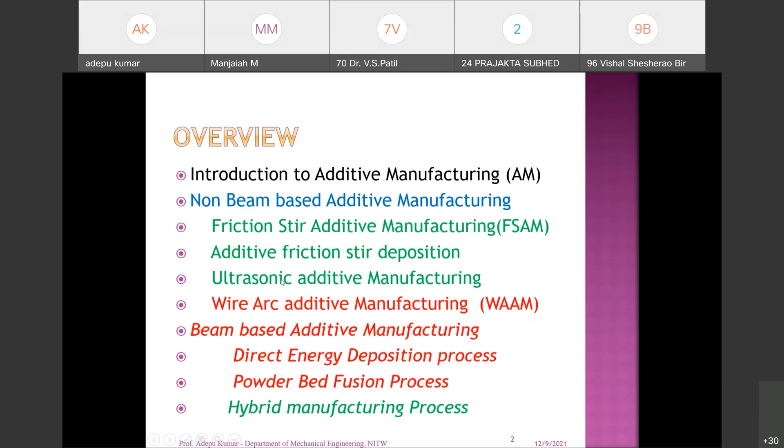So today I'm strictly focused on non-beam based additive manufacturing related to friction stir additive manufacturing, additive friction stir deposition, and ultrasonic additive manufacturing. If time permits, I can also extend to wire arc additive manufacturing. So basically, you can see the various manufacturing processes, how you are going to develop the component.

So based on the customer requirements, you can generate the component. Whatever the form, it doesn't matter from the customer's point of view. Whereas from the mechanical engineering point of view, we are concerned with the properties, how the properties are enhanced from one process to the other process.

So for example, if you want to develop this kind of object through any process based on the customer requirements, initially I can go for a subtractive process, where unwanted material can be removed by milling so that I am able to generate this kind of object. That's why you have to remove the unwanted material. So the material before and after may not be the same. After the milling process, the volume of the material is reduced, so it comes under a subtractive manufacturing process.

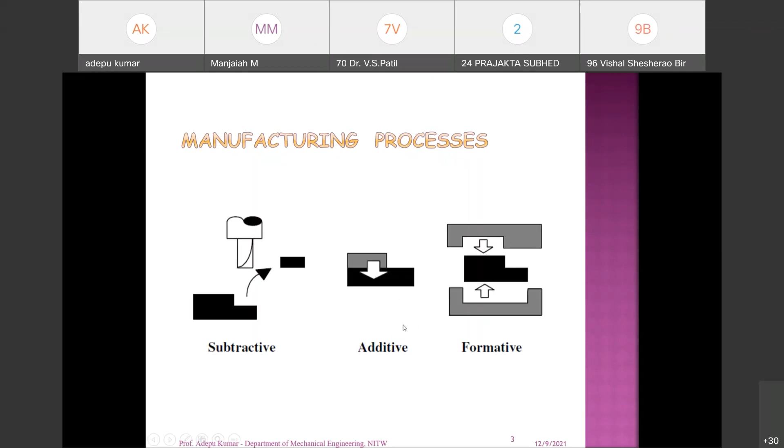So the definition of additive manufacturing is a manufacturing process in which functional parts can be made by adding material without using special tools, jigs, or fixtures. You already have experience in the laboratory sessions. Without need of any additional devices, you can also generate complex structures, because every 2D geometry is unique. You can print that 2D geometry, then build one over the other. Automatically, you can get different features.

So it provides tremendous advantages compared with traditional subtractive manufacturing, especially reduced lead time, and wastage is also minimized, and the cost is independent of complexity. This is the most important advantage of additive manufacturing. Irrespective of any complex geometry, the cost does not vary. Every time you are producing different kinds of features based on your STL file, so with respect to complexity, additional cost may not be increased. That's why it is the greatest advantage.

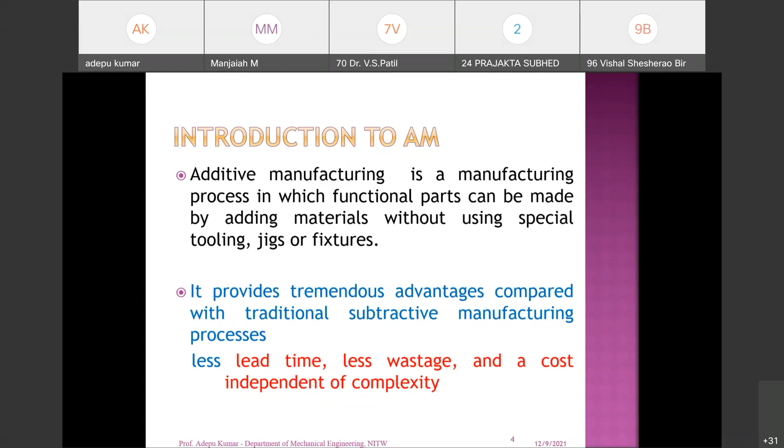So there are 8 stages that previous faculty members have already discussed. I don't want to extend further, but you can see the various stages of how you are going to develop the component for end user applications. The component you are going to generate is based on your idea or your previous experience. That geometry you can generate in the CAD environment, then convert it into an STL file. Then the file is transferred to the AM machine. This file is compatible with the machine, not your CAD file.

So the STL file, the stereolithography file, is a combination of 2D geometries. Each layer is a 2D geometry. Then you can set the parameters according to your requirement. Then you can build the component, remove the component from the substrate, go for post processing, and then use it for end applications.

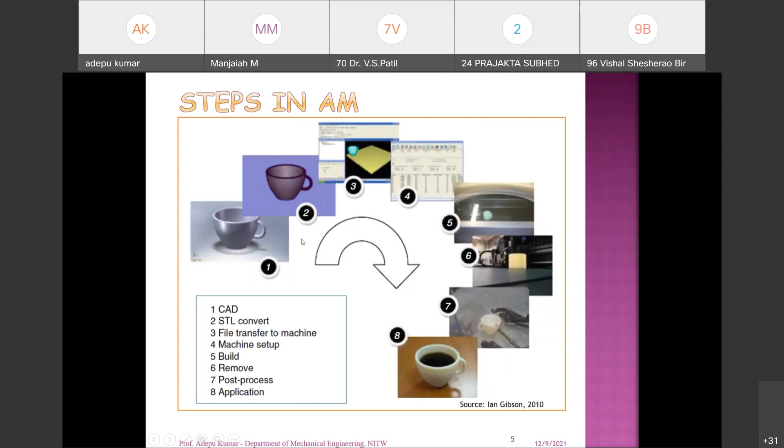So the next slide is very interesting. You know how to produce the component through the additive manufacturing process. In the initial stages you need a CAD geometry, then it will be converted into an STL file.

So many stages are required to complete this object. Okay, fine. So I have different manufacturing processes. For example, I have a CNC facility with high capability, that is a 6-axis vertical milling machine. A CNC milling machine is available with us, and an additive manufacturing facility is also available.

Then if I give a component to you to produce with certain materials, then you can select which process is suitable for this type of material and also component. For example, this is a cup made of ceramic material which can hold hot fluid. Now I want to generate this component through any one of the processes. Then I can see the pros and cons for each and every process. Then I have to select the best one among the two. Only then will you be a good manufacturer or good designer or good production engineer.

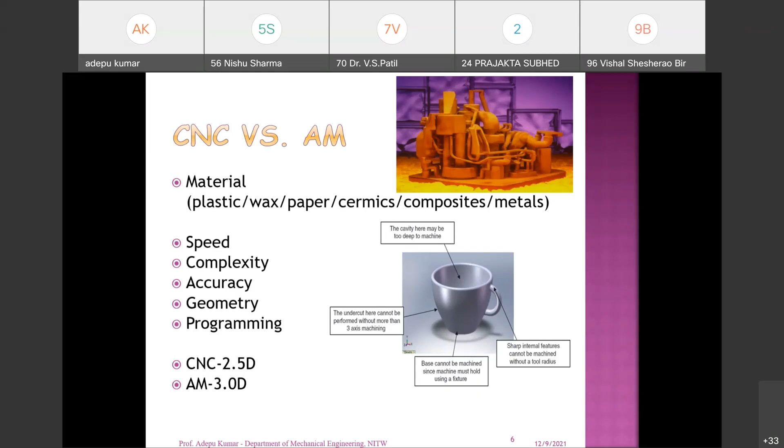After producing the component, when it is applied to any application, there are functional requirements. If the component doesn't meet the functional requirements, again you have to change your design and repeat the process. Even if you don't succeed in the second stage, you can go back to the first stage. You may repeat n number of trials before finally succeeding.

The same principle applies here, but the only change is in the design, within your CAD environment. That is the only problem, to change your design aspects. The remaining process is the same, only the change is done in soft mode, and that way you save a lot of time in generating a successful component through the additive manufacturing process.

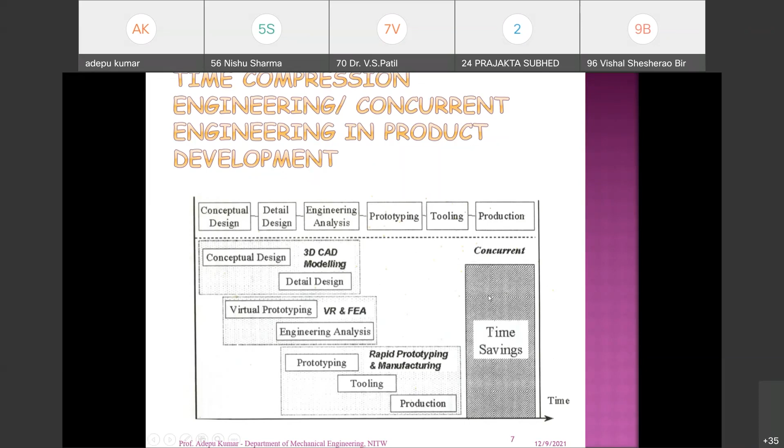When talking about global requirements, consider how much energy you are consuming to produce the component through the additive manufacturing process, whether it is less than or higher than conventional energy consumption. Only then is your process sustainable; otherwise, it is not sustainable.

Once you are producing the component through additive manufacturing process, whether it is going to affect the environment or not - yes. If you are using powder bed additive manufacturing process, it creates pollution, which leads to a global environment problem.

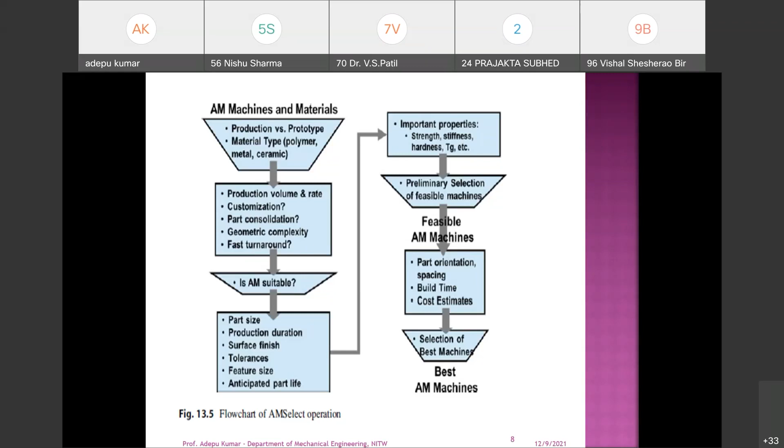So if the problem is feasible and there's a better solution than additive manufacturing, don't shift your process to additive manufacturing. If you are still surviving with this conventional way of producing components, don't look for additive manufacturing. Okay, but if the geometry is complex in nature, then definitely you can go for an additive manufacturing based process.

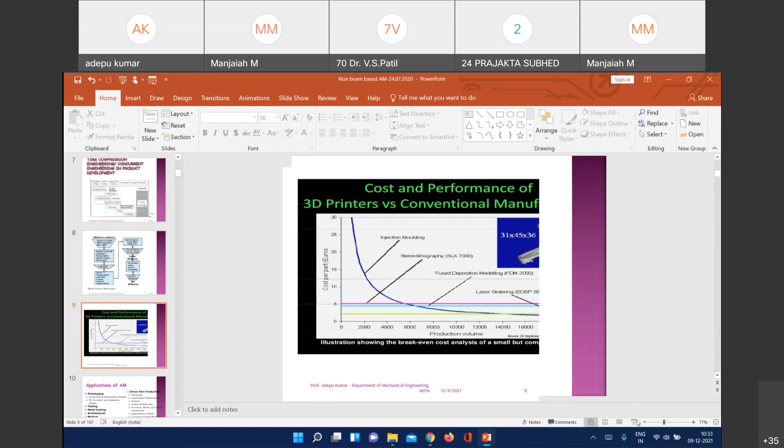Any issue, sir? Yeah, no issue. Okay, sir. Okay. Just I have changed it. Just hold on. Okay, sir. No, I had given 5 minutes break actually. Yeah, now it came, sir. Now it's okay. Yes, sir. Fine, sir. So after 5 minutes, I'll start again.

Today evening, what time will the class start? Afternoon, sir. 12 to 2 is there, sir. Then 3 to 5, sir. 3 to 5. Okay. So today I'll take 3 to 5. So tomorrow lab session, morning in my slot, because tomorrow I'm going to attend a marriage. Okay, sir. Right, sir. So you can inform the students. Yeah, after my session I will inform, sir. Hello? Okay. Yeah, I will inform, sir. Record just better.

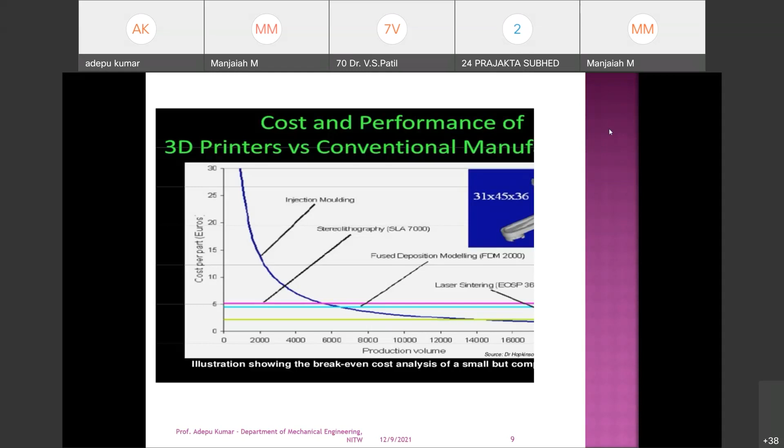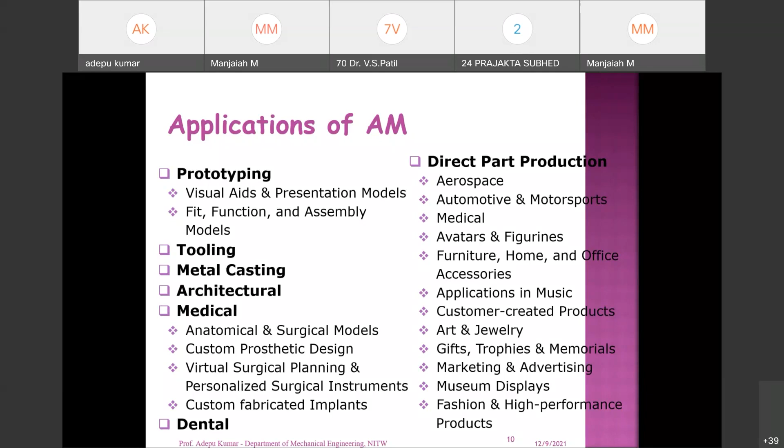These are applications of additive manufacturing. You can find many applications nowadays, from general to real applications: prototyping, tooling, metal casting, architectural, dental, and especially direct part production, aerospace, automotive, medical, etc., and even jewelry items. So these are the components produced by additive manufacturing process for aerospace applications.

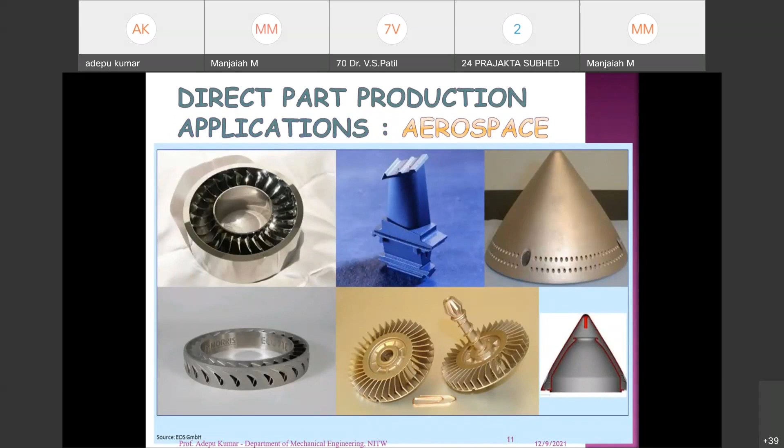Now coming to my actual topic: non-beam based metal additive manufacturing process. Additive manufacturing process, we can define as melting and depositing layer by layer so that you can get the component in three dimensions. Likewise, you can also develop the component in non-beam based additive manufacturing process without melting. That is also a possible method to produce 3D components. So I'm giving one example. For example, a flush door is, we can say, a non-beam based additive manufacturing process.

The flush door's inside and outside layers have a good surface finish and good strength, but the inside material is not that much quality because it doesn't require it. You only need to maintain sufficient strength for the particular door. So in between, they apply adhesives so that joining takes place between one sheet and another, so that finally it comes up as a 3D object, which we call flush doors. That is one example.

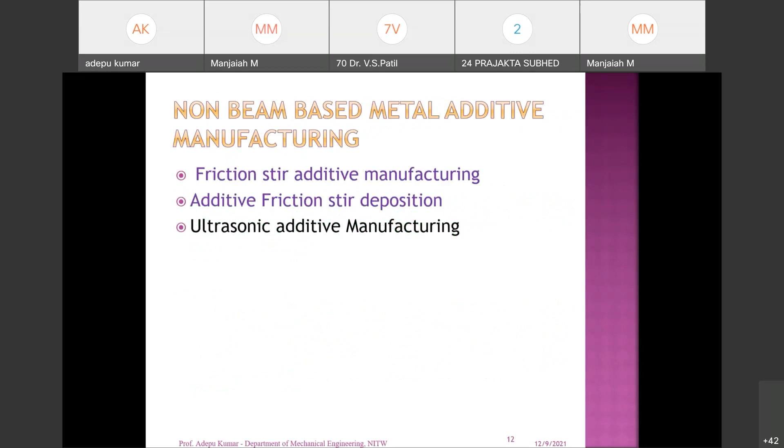So once it is rotated, you can apply the downward force. Initially the bottom portion of the pin pierces through the material because heat is generated due to friction. That heat is transferred to the material and it reaches its recrystallization temperature, where softening of the material takes place. Then at that moment you can apply the force, and the pin will be inserted into the material.

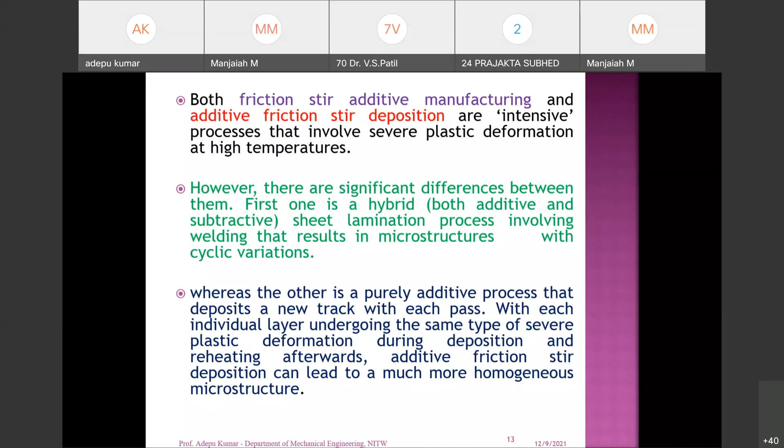However, there are significant differences between them. The first one is a hybrid, both additive and subtractive process. Sheet lamination involves welding that results in a microstructure with cyclic variation, whereas the other is a purely additive process that deposits a new track with each pass, with each individual layer undergoing the same type of severe plastic deformation during deposition and reheating afterwards. Additive friction stir deposition can lead to a much more homogeneous microstructure.

So I am giving a comparison between these three processes as per different criteria. For example, as per ASTM classification, for ultrasonic additive manufacturing, a sheet thickness of the order of 0.1 mm is required, and it also requires a good surface finish. Whereas for friction stir additive manufacturing, a minimum 1.5 mm thickness is sufficient. Whereas in additive friction stir deposition, there is no sheet; we use other techniques to deposit the material.

Then the hybrid process: you can implement both additive and subtractive, and then you call it a hybrid process. It is possible to include both additive and subtractive processes in the case of ultrasonic additive as well as friction stir additive processes. Here, only the additive process; we can also accommodate it, but not much is required. The resolution limiting factor is the subtractive process. This is also subtractive. This one is based on tool geometry. We can also define the properties.

The temperature is relatively high in both these cases, whereas, as I said at the beginning of this lecture, a very low temperature is used for the ultrasonic additive manufacturing process. For the microstructure before and after additive manufacturing, it is similar to the pre-process, that is, similar to your base material, whereas in these there is a refined and equiaxed stir zone and refined equiaxed grains. So you can also modify the grain structure in ultrasonic, friction stir additive, as well as additive friction stir deposition processes.

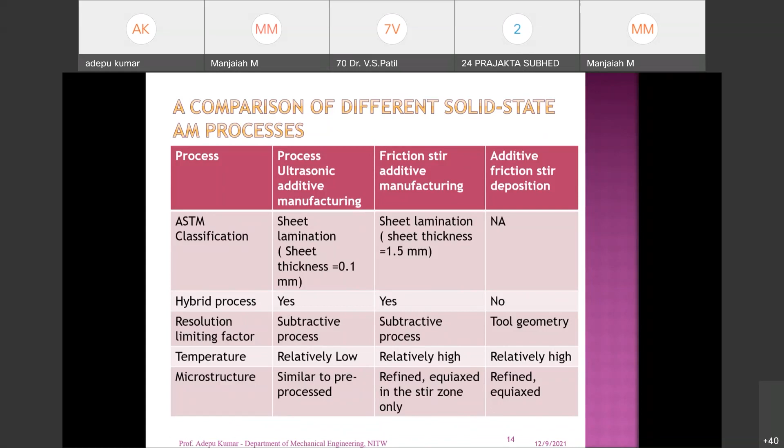So in comparison to ultrasonic additive manufacturing, additive friction stir deposition is fundamentally different in that it is a material deposition process rather than a sheet lamination process. So you are adding a material, deposited material; not a sheet directly attached to the previous sheet. So that is a sheet lamination process.

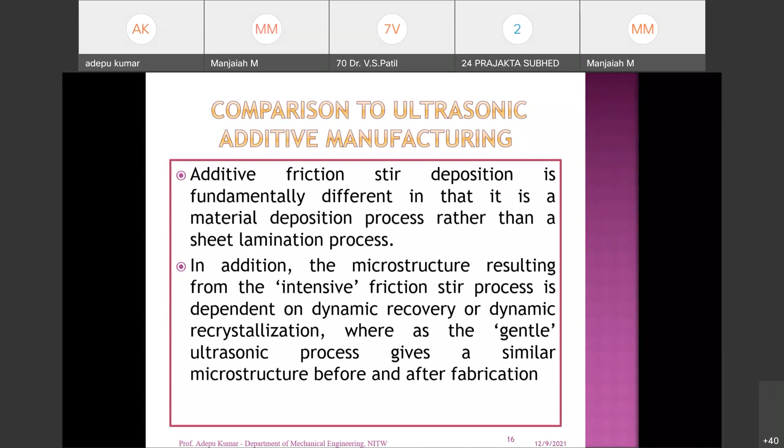In addition, the microstructure resulting from the intensive friction stir process is dependent on dynamic recovery or dynamic recrystallization, whereas the gentle ultrasonic process gives a similar microstructure before and after the fabrication process.

Both friction stir additive manufacturing and additive friction stir deposition are intensive processes that involve severe plastic deformation at high temperature. So here, once the material reaches the requisite temperature, you are applying the rotation as well as moving the tool in the direction of the process, and shearing action takes place. That is, intensive plastic deformation takes place. Due to that, refinement of the grains takes place.

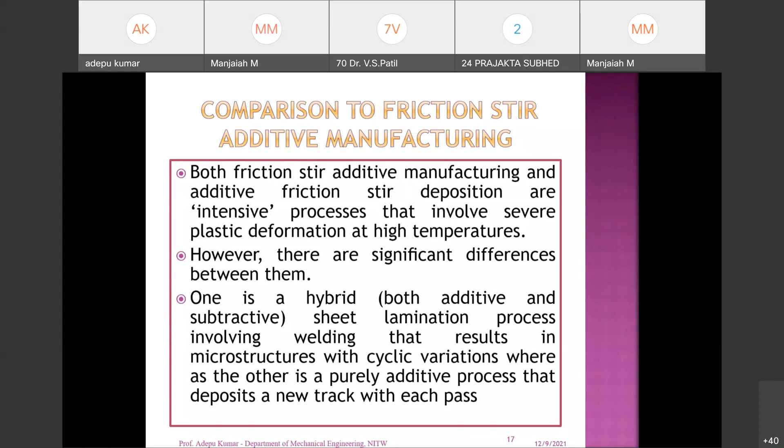However, there is a significant difference between them. One is hybrid, both additive and subtractive. The sheet lamination process involves welding that results in a microstructure with cyclic variation, whereas the other is a purely additive process that deposits a new track with each pass.

So for widespread implementation, metal AM needs to possess a series of attributes such as affordability to customers, convenience and ease of use, energy efficiency, environmental friendliness. This is very important. So in the powder bed fusion process, it will affect the environment because a lot of energy is utilized and smoke comes up during the process. So that will be harmful to the environment.

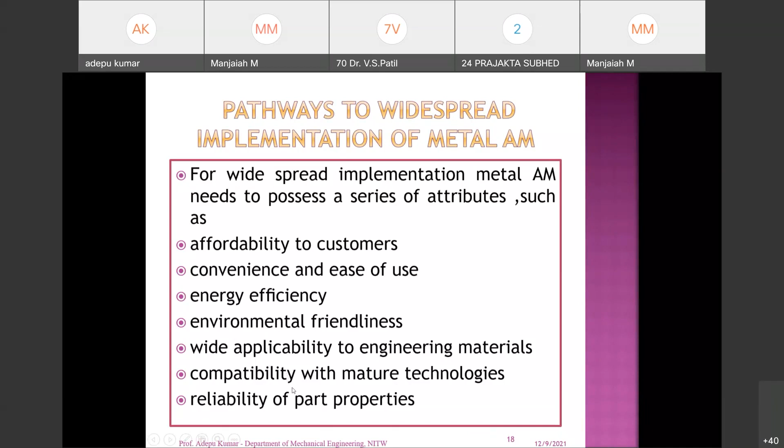Whereas in this case, there will not be such gases because it is below the recrystallization temperature only. We are not reaching the melting point temperature. There will not be any gases at all. So wide applicability to engineering materials, compatibility with mature technologies, reliability of part properties, etc. So it is a solid state process. There is no melting of the material.

As I said, there are different layers of similar materials of similar melting point temperature. You can initially pack them. You can see that the surface of the plate should be uniform throughout the area so that you can avoid voids between the two layers. Suppose it is an uneven surface, there will be a void. That void will be present after the process also. It becomes reduced, but the defect stays as it is. That's why, for friction stir additive manufacturing, the surface is the most important criterion.

So once you keep all four layers, you can rotate this tool, touching the bottom portion of the pin. After some time, that is the dwell time, it reaches the same temperature, then you can plunge through all the layers by applying the downward force so that the shoulder will be in contact, and again it rotates, it reaches the temperature, then you can move the tool in this direction so that the joint is formed. So like that, you can see this structure.

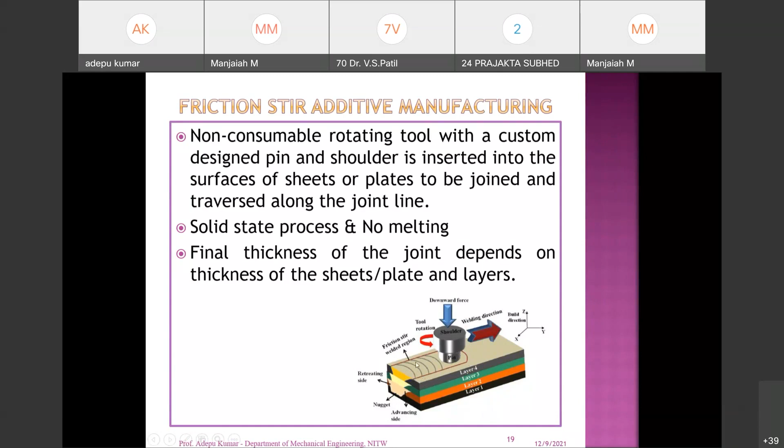We have done some trials extending to this surface on both sides, with 50%, 40% or 20% overlap, so that you can reduce the processing time and join the components very easily. So within a limited time, you can produce a large size of components. That is an advantage. To better understand this process, you can see one video.

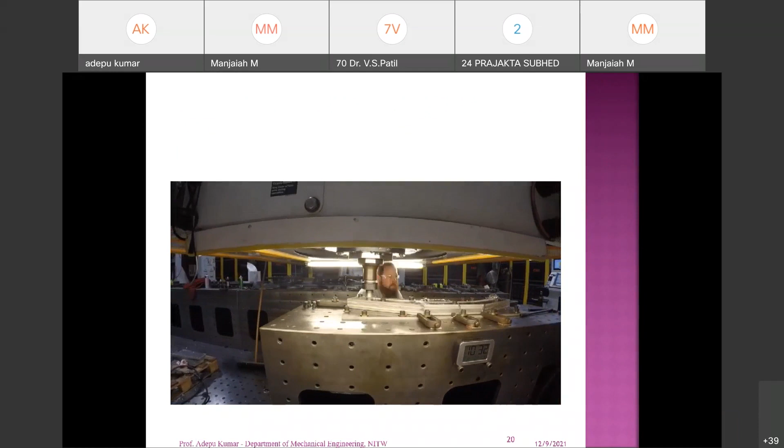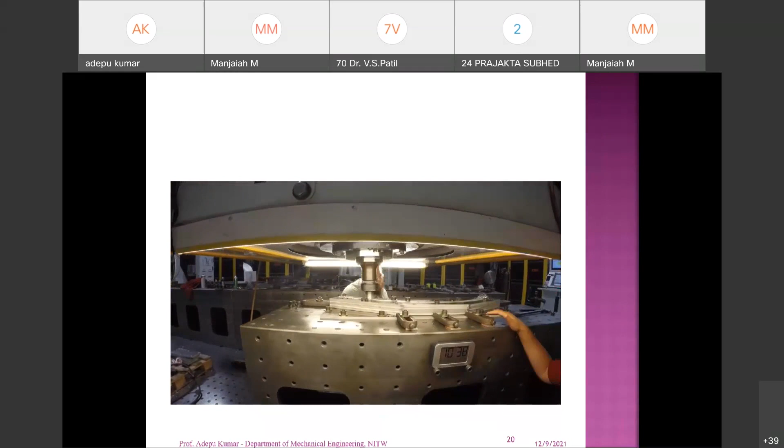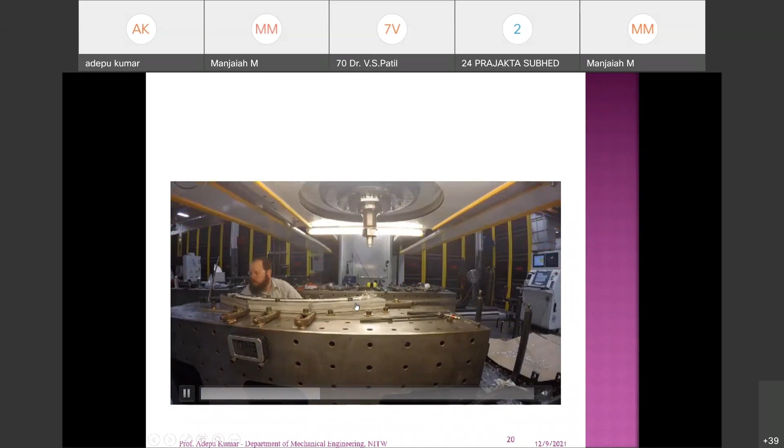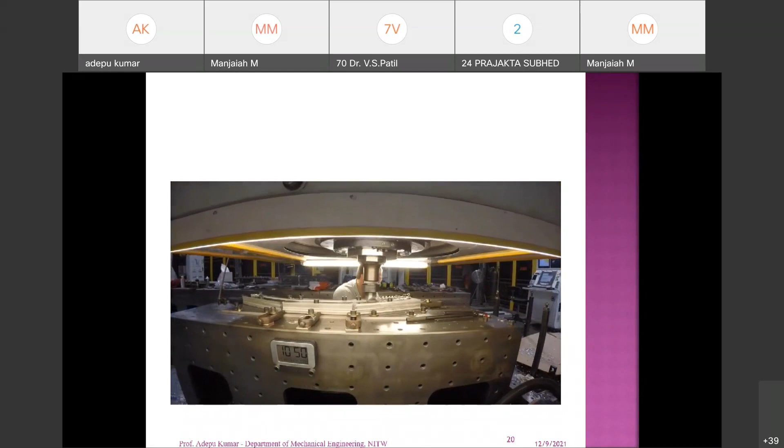So that is the plunging stage. The movement of the material takes place from here to there and to the back side of the pin. The entire width has become an additive manufacturing component.

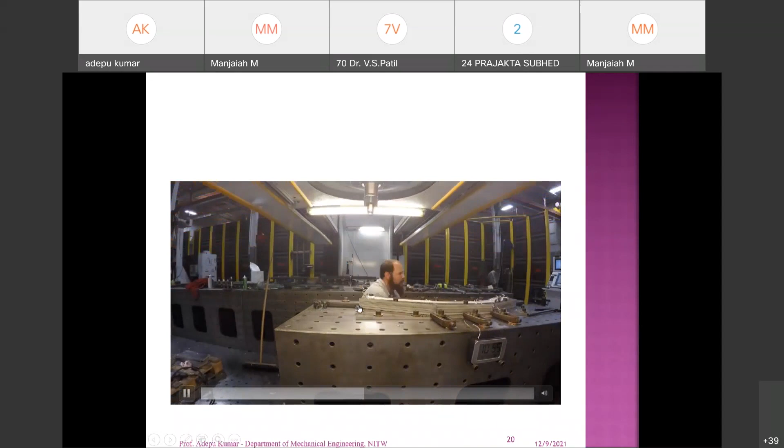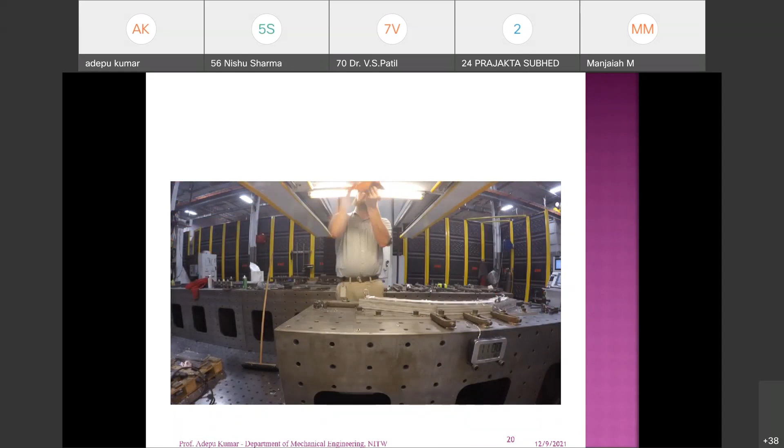Yes, we fix the cutting tool, that is a milling cutter, to remove the unwanted material; that is known as the subtractive process.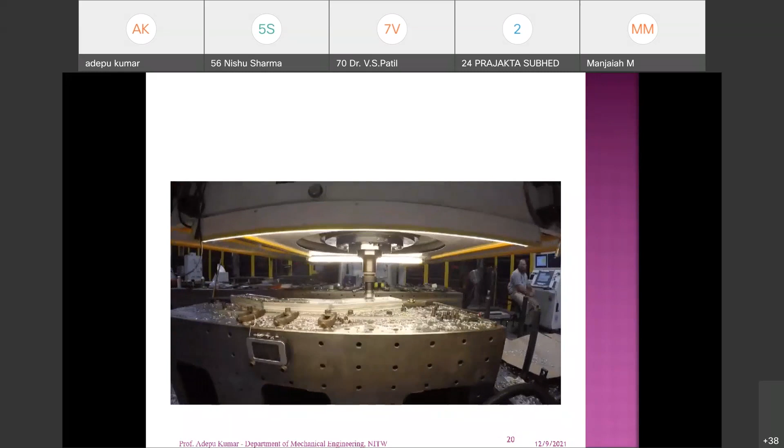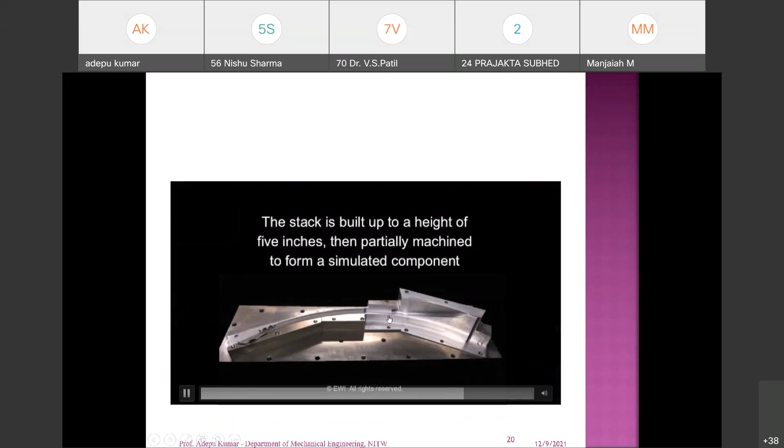Yeah, this is the final component. So how it is very simple to generate this kind of object through friction stir additive manufacturing process.

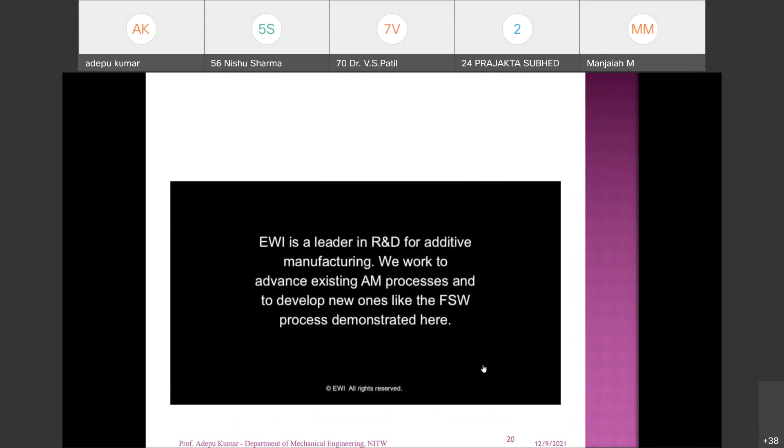Yeah, coming to next process, additive friction stir deposition process. The difference between the tool is in the previous case it is solid one. Now here the hollow one. Just you can insert the filler material which is going to deposit on the substrate. The machine is same, the principle is same. Just you have to alternate your tool design.

So without pin, just you are rubbing against the substrate, both the shoulder and the filler material. Because the filler material melting point temperature is lesser than the solid material, then it early reaches recrystallization temperature. It is far away from that position, so there is no yielding occurs, whereas yielding occurs in the filler material case. Just you are rotating as well as you are sending the filler material by applying sufficient amount of downward force so that the metal is deposited onto the substrate. So this is known as additive friction stir deposition process.

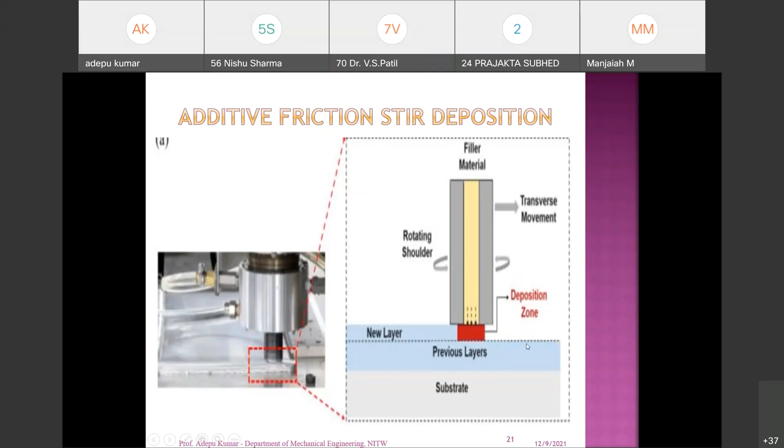So using the principle of solid state welding or friction stir welding, just we can get heat generation by the expense of the friction. So that leads to recrystallization temperature of the filler material early so that you can deposit the material onto the substrate.

So yes, you can see these two pictures in both friction stir additive manufacturing, additive friction stir deposition. So I want to generate this component. Initially, I have to make all the sheets together. Then pin is inserted between all the sheets. Then I try to rotate the shoulder and moving perpendicular to the slide so that the material movement takes place from here to here and fill the backside of the pin so that I can generate this type of component.

Whereas in other additive friction stir deposition, along with a shoulder, you have a filler material which can be deposited on the substrate so that because of the friction, the material is deposited on the substrate.

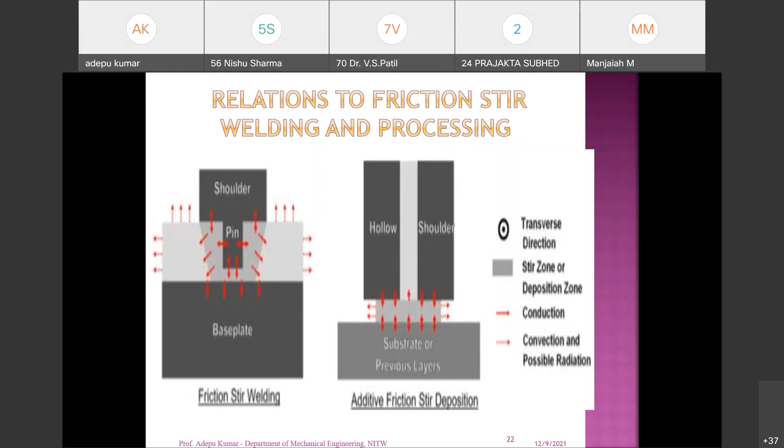Then coming to our additive friction stir deposition process or friction stir additive manufacturing process, you can see there is a wide rate, building rate as well as accuracy. Because within the stipulated time, you can able to generate large size components, especially aerospace applications. The material may be titanium alloys as well as aluminum and magnesium alloys, to be done through friction stir additive manufacturing process.

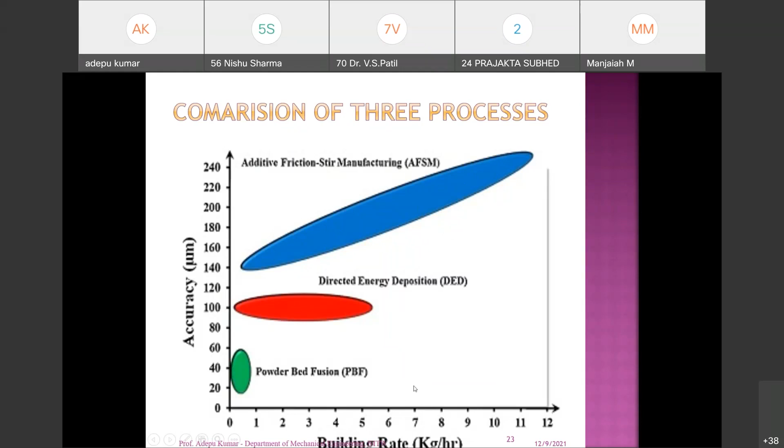Bullet train panels, people are doing panels which were made by titanium alloys, doing friction stir welding as well as friction stir deposition process. That will give more high strength to weight ratio for high speed trains like bullet trains. So this much of advantage when you are talking about accuracy as well as building rate with respect to the additive friction stir manufacturing process.

So additive friction stir deposition, you can produce not only similar materials, you can also produce anisotropic materials. That the variation of properties along the dictated direction, it is also very simple task to complete this through these techniques. This is one of our scholars' work. So he wants to develop a functional graded material through this technology.

So first of all, you should understand what is the functional graded materials. The properties are varying from one location to other location with respect to the thickness or with respect to the length, whatever it may be. In particular direction, the variation of the property occurs. Those materials come under functional graded materials.

Why we need? For example, you want to develop a shoe brake. So outer layer, which is always contact with the rim of the wheel when you are applying the brake. So that layer should be very harder than the bottom layer. Why we need? Why not total component should be a harder one?

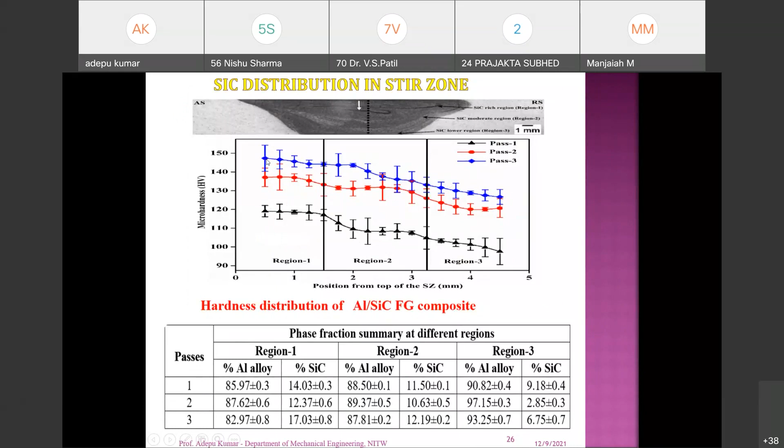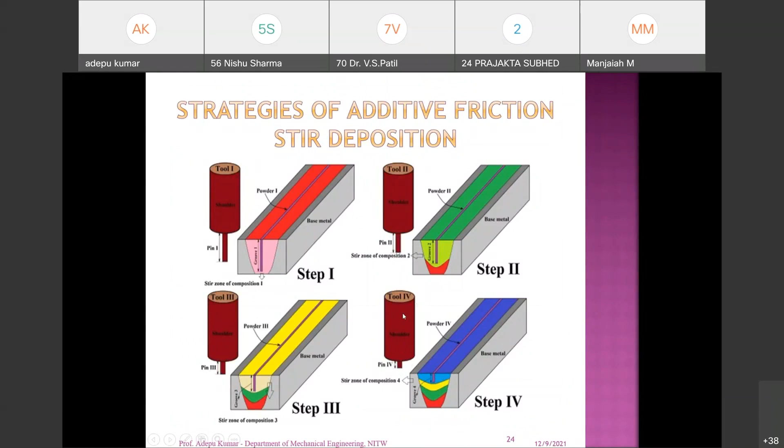Let us say 150 HV. The initial one is 120, so to 150 HV, 30 HV is improved by doing this process. So this part becomes a functionally graded material product. You can also extend it to other regions with the same principle, so the entire block becomes a functionally graded material. Like this, you can get functionally graded materials by depositing the reinforcement with different compositions, so that you get variation of the properties in terms of directions.

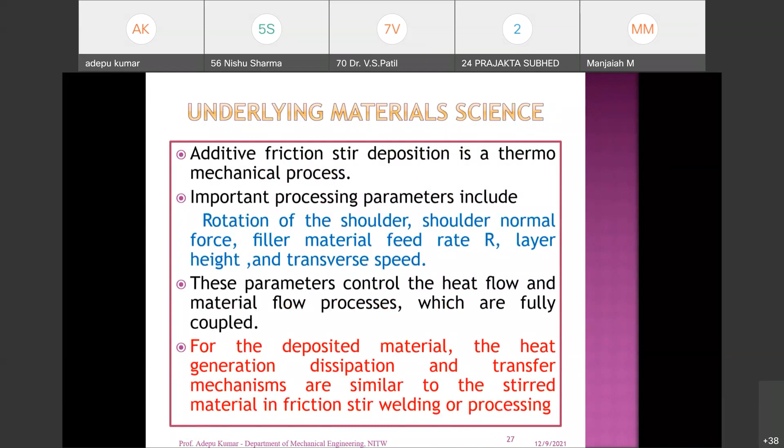This is all the information related to what I spoke about regarding heat generation. The solid state nature, the peak temperature of an additive friction deposition process normally ranges from 60 to 90% of the melting temperature.

Because of the absence of melting, parts do not suffer from the issues associated with rapid solidification. Especially, we are reducing a lot of problems during this process: porosity, hot cracking, elemental segregation, dilution, and finally dispersed oxide particles and residual stresses. The low porosity and residual stresses are the as-deposited part.

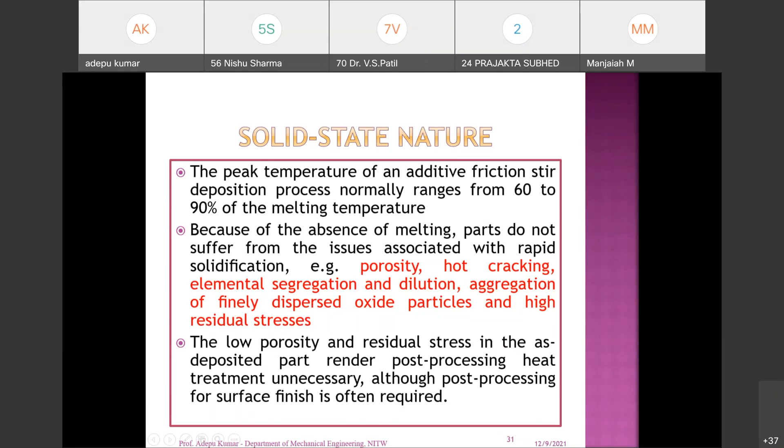So this is very useful for industrial applications. During welding or melting process, it's impossible to get these kinds of combinations. With this technology only, you can successfully complete this job irrespective of the difference in melting point temperature.

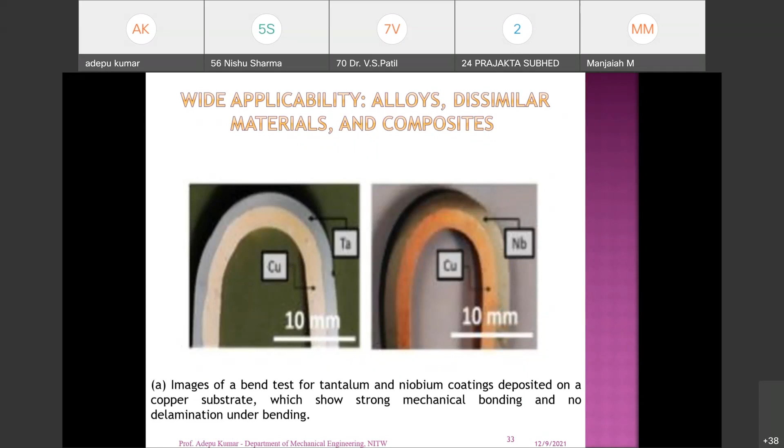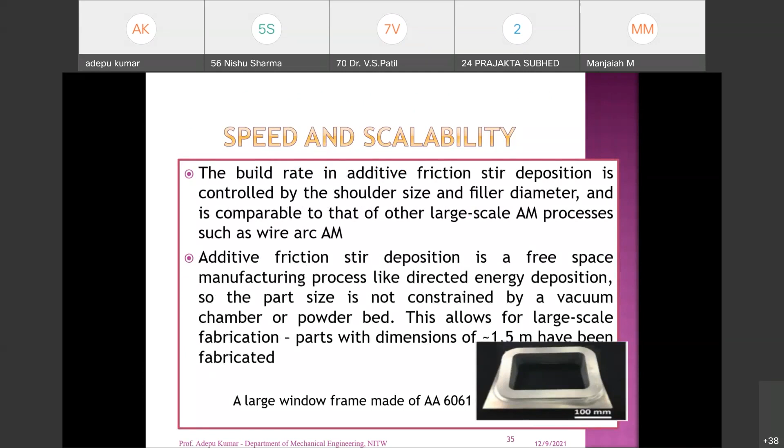So speed and scalability - you can also build large parts, only thing is you need big machines. You can see the non-beam flexible feed material and scalable benefits of the additive friction deposition process: no melting, low energy, low cost, cast alloy, consolidated powder, high building rate, refined grains because of the dynamic recrystallization, no segregation.

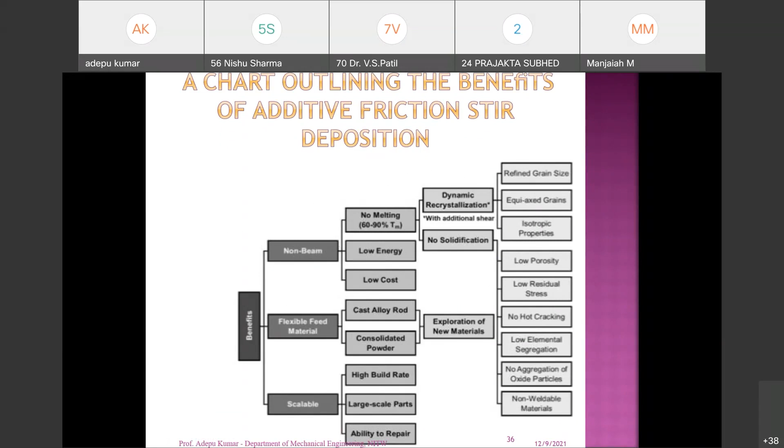We have discussed all the problems that can be avoided through non-beam based additive manufacturing process. So I cannot say this is the best process - each and every process has its own limitations apart from many advantages.

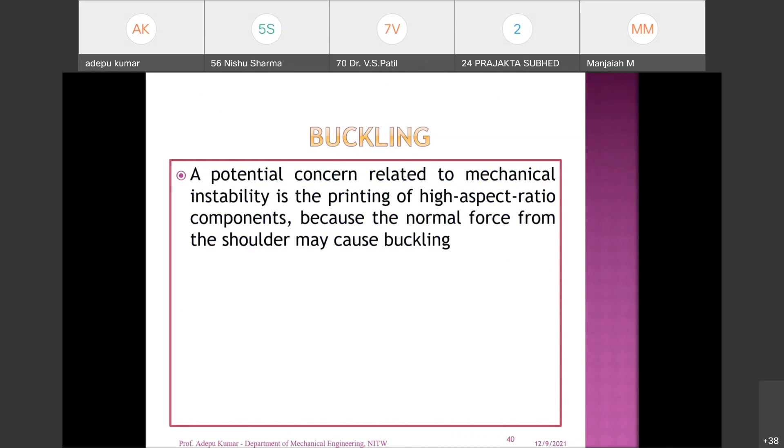Mainly the buckling issue occurs when you are going up to a certain height. Beyond that, buckling is a problem because you are always applying downward force. Without force you cannot build the component because we need friction - for that you need sufficient downward force and firm contact. That's why buckling is a major issue in this case.

Another problem is tooling, which is also very important because it is always rubbing against the stationary surface. Due to that, wear and tear takes place, and every time you have to change the tools.

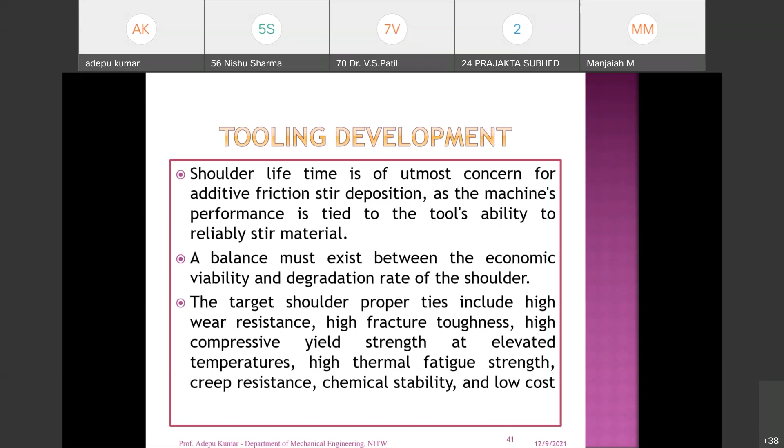That's why people, including our students, are suffering a lot because they have to make the tools. Initially you have to make 10 tools at a time so that you can change them frequently depending on the situation, so you can complete the job within the stipulated time.

The time is 11:15, then 11:20. Now I think it may be...

Does the sample facility available, sir, with respect to friction AM? Sample facility means - like capability of preparation, I don't understand. FSW with AM, is it available? I think he is asking, sir. Yeah, it's available, no? Yeah, available.

We are having 3D printing. Also we are having FSW. Yeah, both the facilities are available. Metal additive manufacturing, powder bed fusion process, as well as friction stir additive manufacturing process also available.